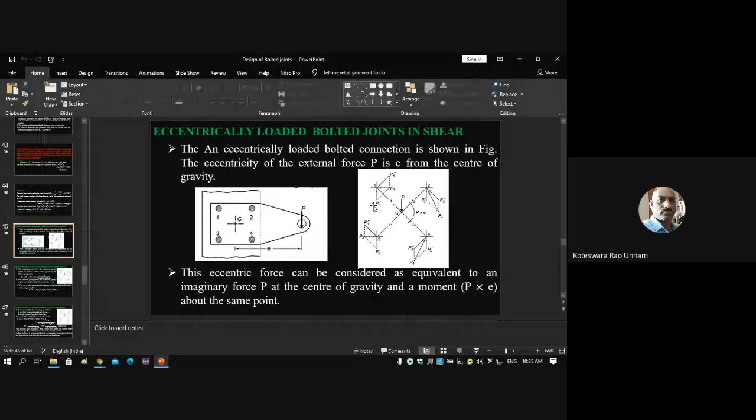So what we'll do is, I just want to know whether most of you attended this class or not. If not, we'll start. No, sir. So most of you have not attended the class, right? Yes, sir. Okay, so we'll start from this point onwards. Again, we'll discuss this and we'll go ahead.

So here we have a bolted joint which is subjected to eccentric loading. What is the meaning of eccentric load? See here, I have a bolted connection, so 4 bolts are connected. This is what we'll call a bracket, and let us say this is a wall. A bracket is joined or connected to this wall by 4 bolts. Here there are 4 bolts. So now this bracket is subjected to a force P at this location.

So now if the center of gravity of this bolt system... here it is not a single bolt, in this particular application there are only 4 bolts. You may have 6 bolts, or 5 bolts, or 3 bolts, any number. But most of the cases you have more than 1 bolt. If there is only 1 bolt, you can calculate directly what is the direct shear load and what is the bending load. But generally whenever a bolted connection like this is there, you will get more than 2 bolts.

In this particular application there are 4 bolts. So whenever there are more than 2 bolts, the first thing you have to do is find out the center of gravity of that bolt system. Here, G denotes the center of gravity. So this is the center of gravity of these 4 bolts.

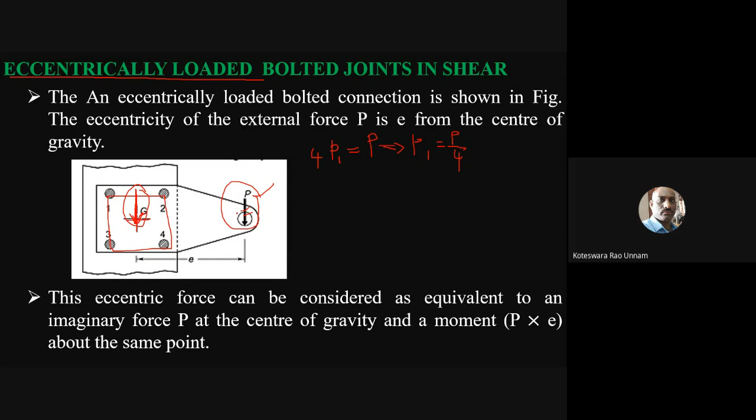That's what we did in some of the problems discussed earlier. But here the problem is the load is not acting at the center of gravity, it has some offset distance. So we need to find out the effect of this force, not the effect of the force acting at this location.

So what we need to do is transfer this force from this location to the center of gravity, G. As we already discussed in case of riveted joints, if I transfer a load from one plane to another plane, its effect is a direct force plus a moment.

So here the direct force magnitude is the same. If I transfer this load to G, the effect is a load of magnitude P in the same direction, plus a moment. If I take moment about point G, the moment of this force is clockwise, so this P will rotate the bracket in the clockwise direction, creating a clockwise moment, whose magnitude is load into perpendicular distance.

This perpendicular distance we are taking as E. So it will create a moment in the clockwise direction with a magnitude of P into E, where P is the applied load and E is the eccentricity.

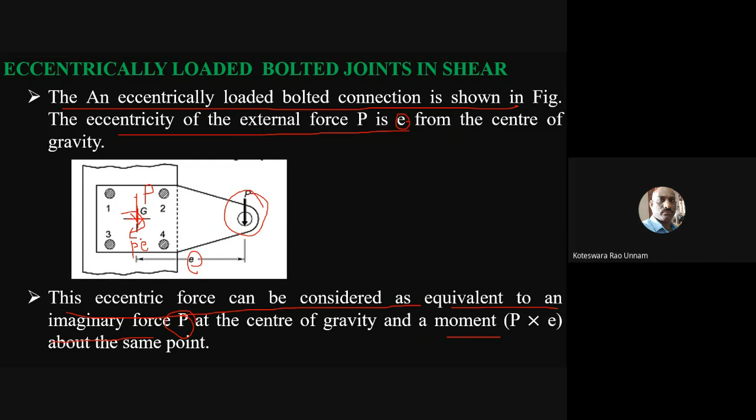This eccentric force can be considered as equivalent to an imaginary force P at the center of gravity. That means we need to model this load as an equivalent load acting at the center of gravity, whose magnitude is P and in the same direction, and in addition to that P, a moment of P into E about the same point. So this is going to be the effect of transferring this force from this location to this location.

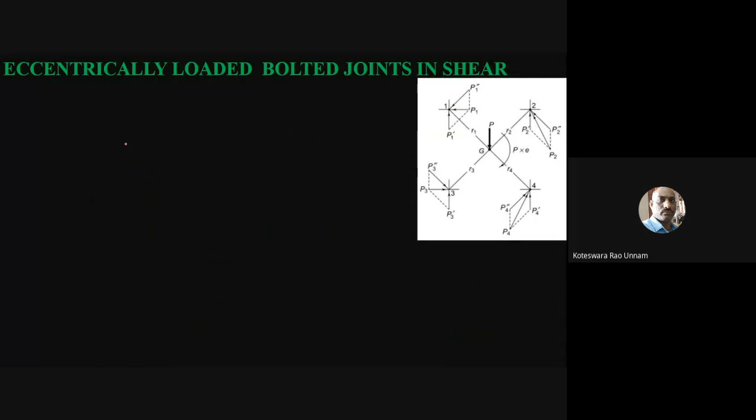So now you can see that, because of that, I'll go to the next slide. The imaginary force P at the center of gravity results in primary shear forces given by the following equation, which is what we already discussed. One of the assumptions is that all the bolts are carrying equally, meaning we assume the size of all the bolts is the same, because we don't know — we have to calculate what is the diameter of the bolts.

What we'll assume is all the bolts are having the same diameter. If you assume like that, then the total load is given. Total load is P here. Since it is acting at the center of gravity of this bolt system, the load on each bolt is the same.

So now the primary shear force in the first bolt is denoted by P1', second bolt P2', third bolt P3', and fourth bolt P4'. That's what you can see here also. Since the applied force is in the downward direction, obviously as per Newton's law, the reaction should be in the opposite direction.

So therefore, we are applying a force to this, then the reaction of the bolt is going to be P1'. First bolt is P1', second bolt is P2', third bolt is P3', fourth bolt is P4', and its direction is exactly opposite to the applied force. So here it is vertically downward, then this is going to be vertically upward. And the magnitude of P1', P2', P3' and P4' is the same. Why? Because we are assuming all are having the same diameter.

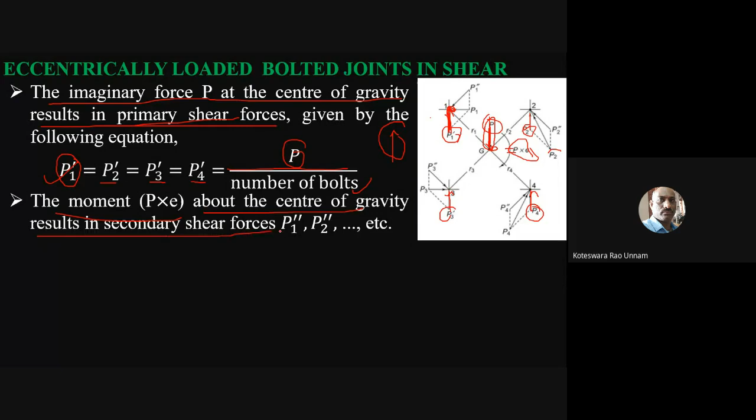Then I'll see what is the effect of this twisting moment P into e. The moment P into e about the center of gravity results in secondary shear forces. Like I already told you, this moment will create a twisting moment, so the twisting moment can be taken as a combination of secondary shear forces. So for that, start from the center of gravity of the bolt system.

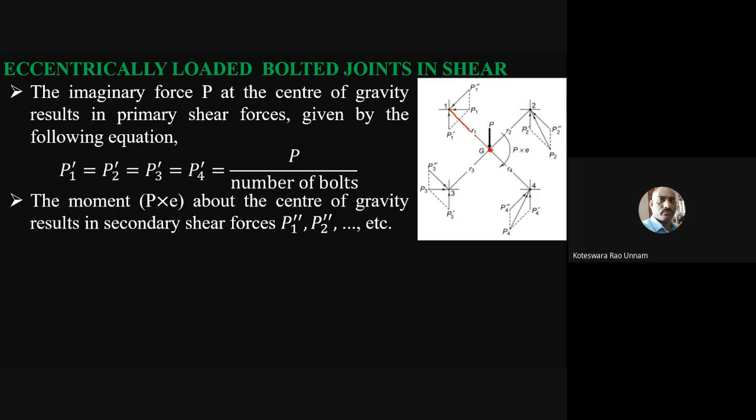You need to join all the centers of the bolts. This is the line joining the center of bolt 1 to G. Similarly, center of bolt 2 to G, center of bolt 3 to G. This is the line for bolt 4, and G is connected like this. Then, if I want to calculate this twisting moment here,

I'll assume that a secondary shear force will act on the bolt perpendicular to this line. Similarly, the secondary shear force perpendicular to this line, and then perpendicular to this line. That means here this angle is 90, this should be 90, this should be 90, even this is also 90. But I know the perpendicular direction; whether it is upward or downward, I can't say. So I want to identify in which direction it is going to act.

For that, you need to identify the direction of your applied moment. The applied moment is like this, clockwise, so the secondary shear force direction should be opposite. Like the primary shear force is upward since the applied load is downward, similarly here the moment is clockwise, so the reaction should be anti-clockwise. That means if the secondary shear force is acting like this, then about G this force will create a moment acting in the anti-clockwise direction.

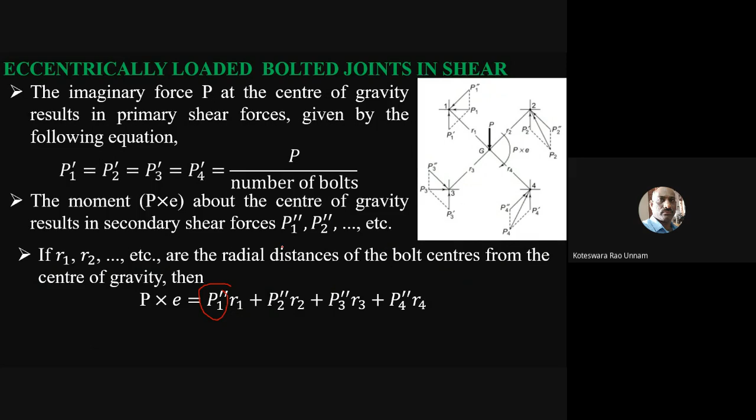So now, to simplify this complexity or to reduce the number of unknowns, we'll assume that the secondary shear force is directly proportional to R. R is nothing but the radial distance from the center of gravity to the bolt center.

If I assume the secondary shear force is directly proportional to R, then I can further simplify this equation. If I want to remove this proportionality symbol, I'll write P1 double dash as some constant, the proportionality constant C, into R1. Similarly, P2 double dash I'll write as C into R2, and so on.

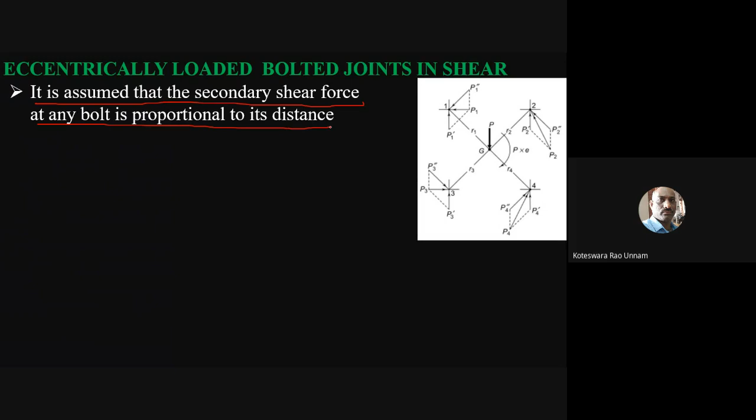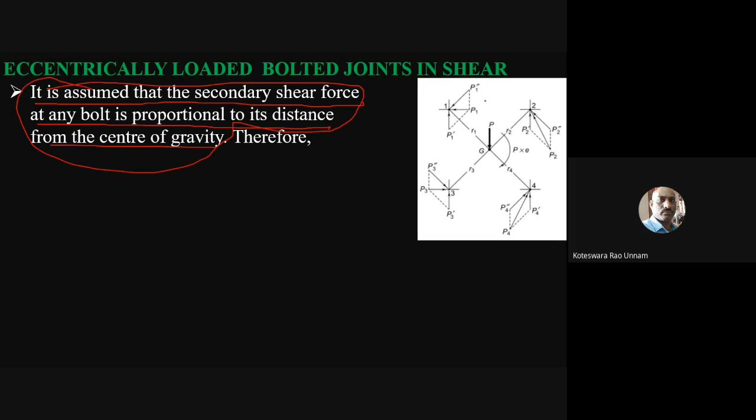So it is assumed that the secondary shear force at any bolt is proportional to its distance from the center of gravity. This is the assumption. With this assumption, we can remove the complexity in solving the secondary shear forces. Therefore, I can write P1 double dash equals C R1, P2 double dash is C R2, P3 double dash is C R3, P4 double dash is C R4.

Now I'll substitute this into our earlier equation, the equilibrium equation we get from moment equilibrium. In place of P1 double dash, I'll write C into R1. For P2 double dash, C into R2. P3 double dash is replaced by C into R3. P4 double dash is replaced by C into R4.

So if I do that, what do I get? C is there for all the terms, so I can take C common. Then I'll have R1 square plus R2 square plus R3 square plus R4 square. From this, I can calculate the C value first. Once I know C, and I know R1, I can calculate P1 double dash, P2 double dash, P3 double dash, as well as P4 double dash.

If I bring the quantity R1 square plus R2 square plus R3 square plus R4 square to the other side, I can write an expression for C. That is nothing but P into E divided by R1 square plus R2 square plus R3 square plus R4 square.

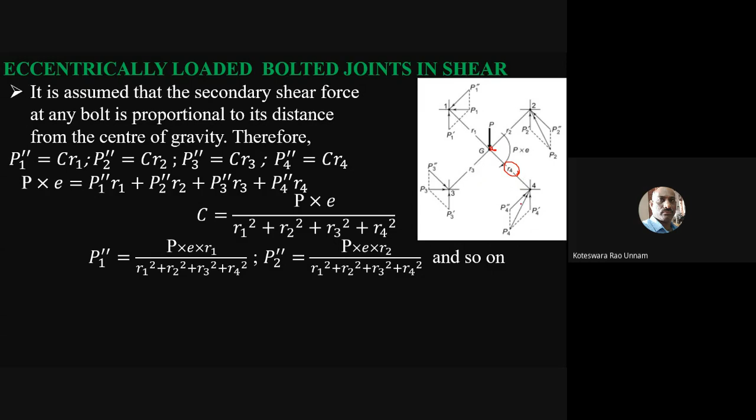If you compare, you can easily identify the farthest point. The bolt with the larger value of R is the farthest from the center of gravity, so that bolt is subjected to the maximum load. Once you identify that, you can calculate the resultant. The primary and secondary shear forces are added by the vector addition method to get the resultant shear forces P1, P2, P3 and P4.

In this analysis, it is assumed that the components connected by the bolts are rigid and the bolts have the same cross-sectional area. I think I already told you. With that assumption only we are able to find this. So this is how you can do the analysis or design of a bolted system when it is subjected to an eccentric load that creates a shear load in the system.

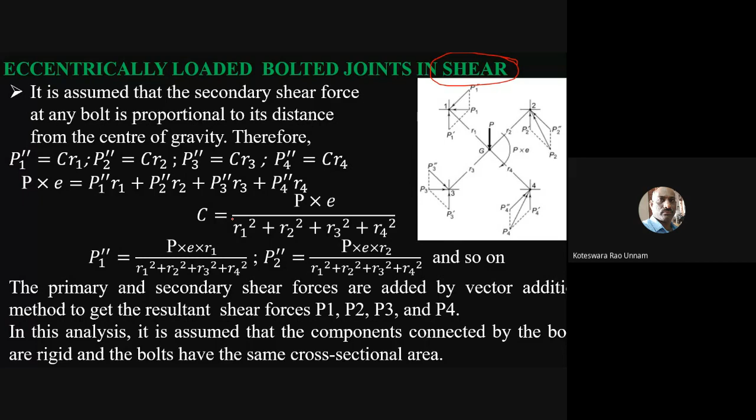Why I am stressing it is only shear is because we have another kind of eccentric load which will not only create a shear, it will create a bending moment also. That we'll discuss maybe in the next class or coming classes. So this is about this one.

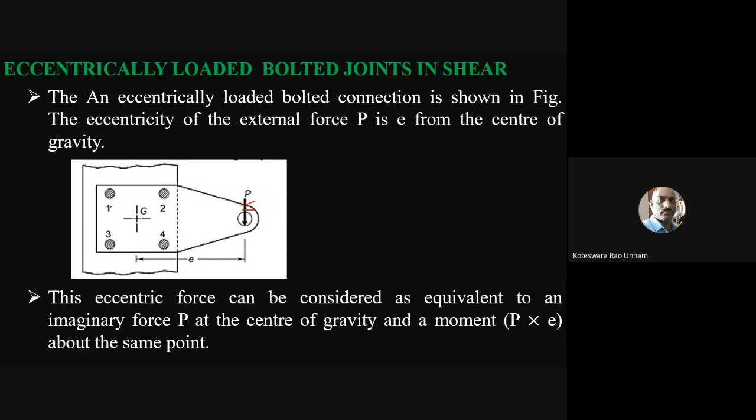So for this, you have to first identify the effect of this eccentric load, whether it is creating a twisting moment or a bending moment. If it is creating a twisting moment, we'll call it an eccentric load on the bolted joint which creates a shear stress. If it is a bending moment, that is a different case, which we'll discuss later.

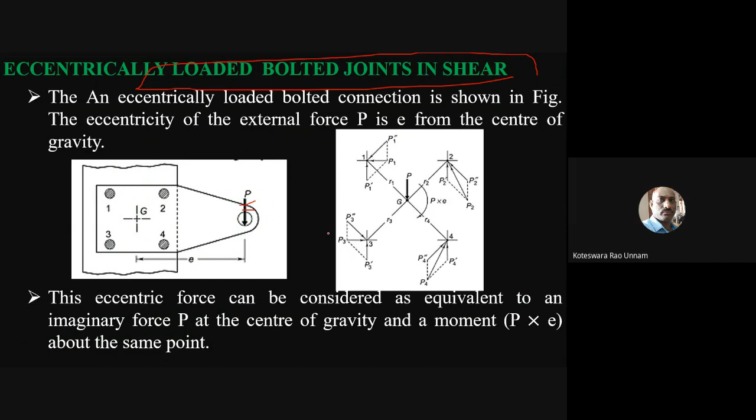So now we'll take up one numerical problem on this, and then we'll close this topic. So this is the problem we are going to consider.

So just note down. Anyway, we have sufficient time, 20 or 25 minutes are there, so we can complete this within the 25 minutes. It's not an issue.

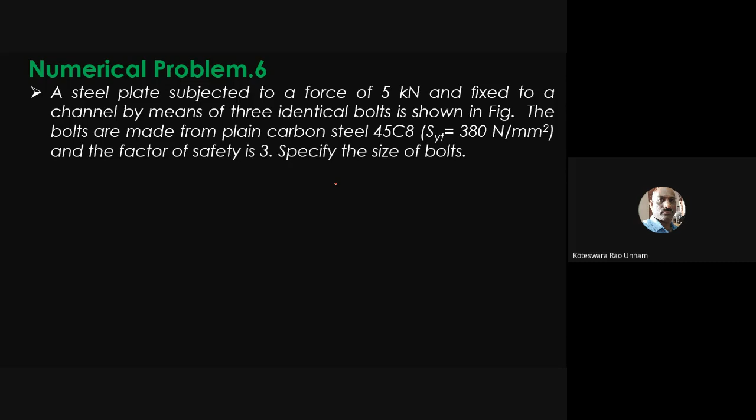But whatever procedure we discussed so far, with that procedure you have to solve this problem. So first note it down, then we'll discuss the solution. Take 2 to 3 minutes to note it down. Once it is done, just inform me so that we can discuss the solution.

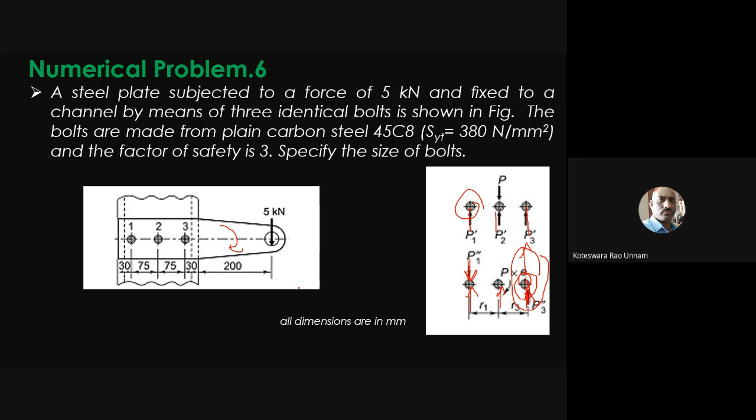So therefore, this is bolt 3, which is going to be subjected to the maximum shear stress. So we need to design the bolt system based on bolt number 3. That's it. Okay, so I think now we are in a position to do this. I'll show you the calculation and then you can try it.

So primary shear force is nothing but P1' = P2' = P3' = P by 3, which is 5 kilonewton by 3, which is 1666.67 newtons. Then the secondary shear force: these formulas are there in your data book also. No need to remember all these things. Everything is there in your data book.

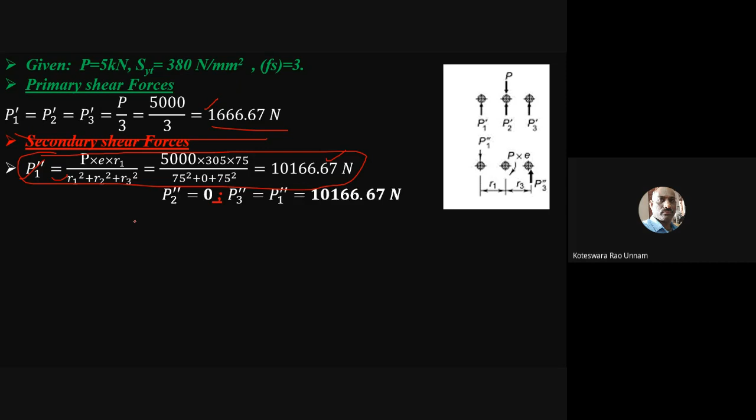So using this formula, you can calculate P1'' and P2''. P2'' is 0, like I already told, because R2 is 0. P3'' is also the same as P1'' because R3 and R1 are both the same, 75 and 75. So you will get P1'' and P3'' as the same. So you have to identify whether bolt 1 or bolt 3 is subjected to maximum shear force, based on the resultant.

But for bolt 1, they are in opposite directions. One is acting upward, another one downward, so they nullify the effect of each other. So this is not the bolt subjected to maximum load. In the case of bolt 3, both are acting in the same direction, so this is going to be the maximum force. So we need to consider bolt 3. The resultant shear force on bolt 3 is maximum because both are acting in the same direction.

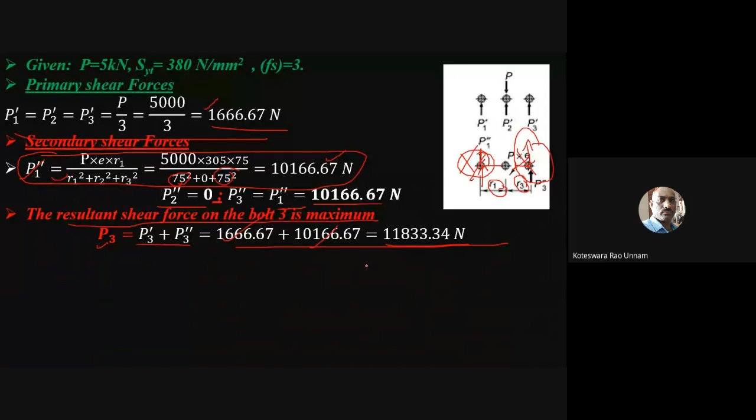So P3 is the summation of those two forces. If you sum up the primary and secondary shear force, we get 11,833.34 newtons. Then the shear stress is tau = P3 / A. P3 we calculated, A is pi by 4 dc squared, like I already told. So this is the resultant shear stress in bolt 3. Then you need to use the allowable shear stress to design this.

Allowable shear stress is 0.5 times Syt divided by Fs. Syt is given as 380. If you substitute that, allowable shear stress is 63.33 newton per mm square. Now equate the shear stress to 63.33, and from this you can calculate dc. If I equate that, I get dc as 15.42 mm.

Once you know dc, you can calculate d using this relation, or else take it directly from the data book. Instead of taking it directly, first use this relation: d = dc / 0.8. Always use this relation. You get 19.28, which is not a standard diameter. So you need to look in your data book for the standard nominal diameter. 20 is going to be the standard nominal diameter for the bolt.

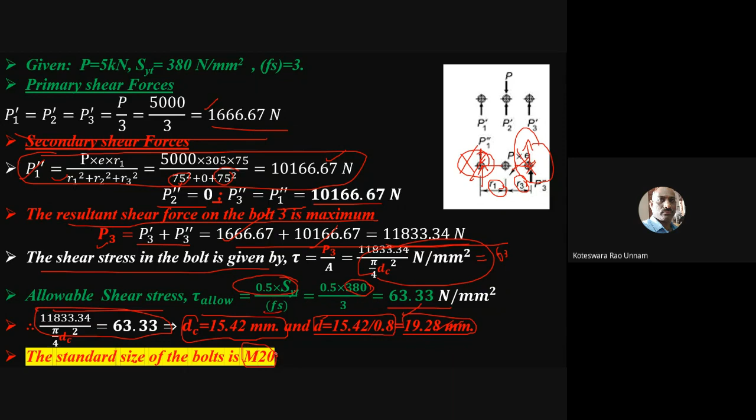If you refer to your data book, you can see that also. If you have a data book with you, open it now and see what standard diameters you have. 19.28 is definitely not going to be there. I am opening the data book; you also open it. Open chapter number 8, where I already showed you all those formulas. Then go to page number

18.16. The standard diameters: 16 is there, 18 is there, and after 18 it is only 20. You don't have 19.28. But here we got 19.28, so you have to choose M20 as your standard diameter for the bolt. So that is the solution. This is how you can solve the problem.